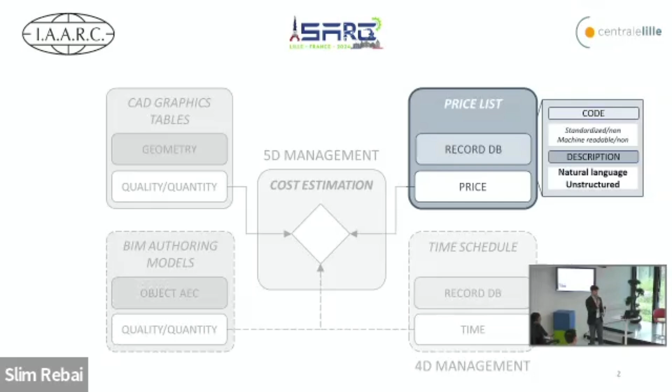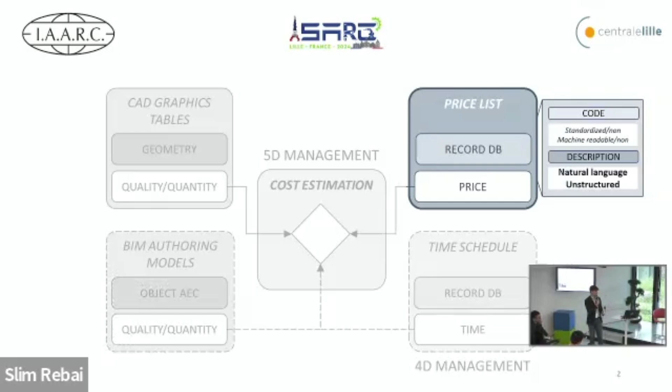In Italy, we have a price list that is a catalog of all the cost items necessary for the development of a construction process and the cost estimation in public tendering. And this price list is based on cost items in natural language. These items are not structured, and this is one of the main issues because this information is not machine readable, but only human readable. And there's no possibility to relate this information to structured data and validate this information at the end of the cost estimation process.

The aim of the research is to standardize this cost data, developing a cost ontology based on several entities characterized by specific attributes, starting from unstructured data and defining a new structured cost data.

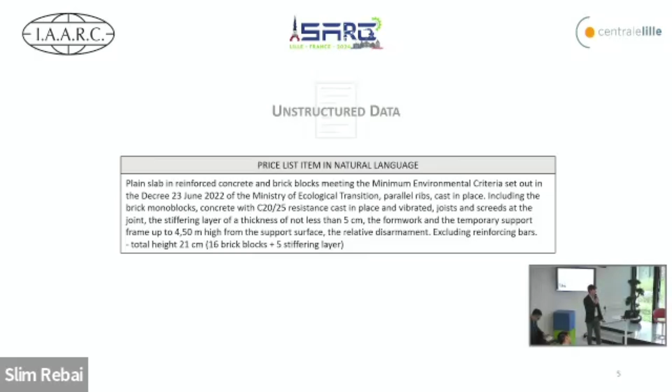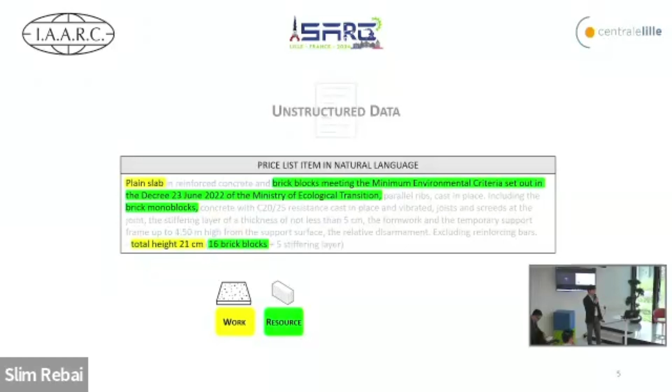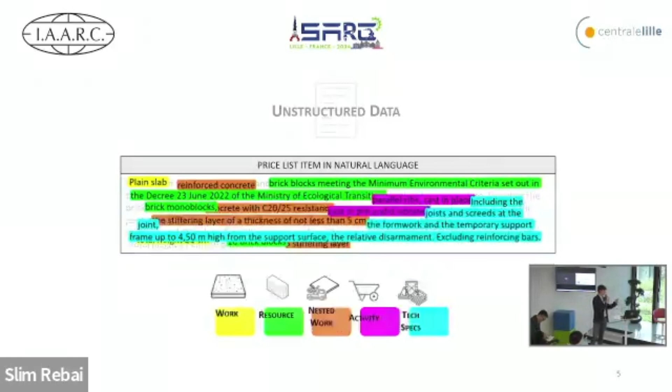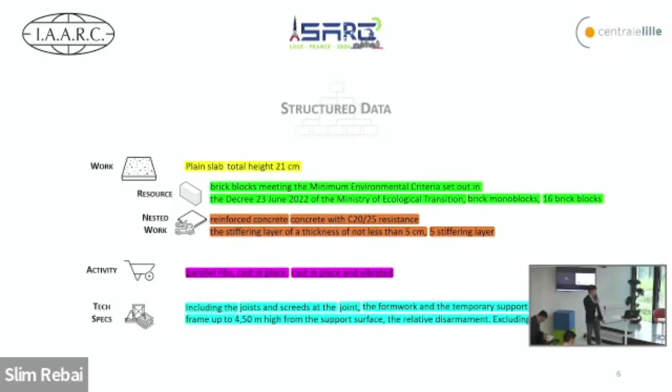This is an example of cost items in the price list of Lombardy region. And we can see that there's a lot of information that is not clear, but there's a lot of scattered information in this description related to the main work, to the resource, to the nested work, to activity, and so on. The aim of the research is to structure this data and define a clear and transparent structure for the cost items to ensure the information can be readable by a machine.

First of all, we define a new cost item architecture based on several entities. These are not simple text strings, but are characterized by several attributes. We divide the cost item into main groups, the construction works and the elementary resources. The elementary resources consist of labor resources, equipment resources, material resources, and the construction work consists of two abstract entities. The work entity is the physical entity of our construction work, such as the wall, the slab, and so on. And the activity is the action that must be performed to obtain the construction work.

Each of these entities is characterized by several attributes in which we can store this information, and these attributes were defined with the collaboration of several practitioners and industries in Lombardy region, with about 200 meetings in the first year of the project. This is an ongoing project that we are developing with Lombardy region.

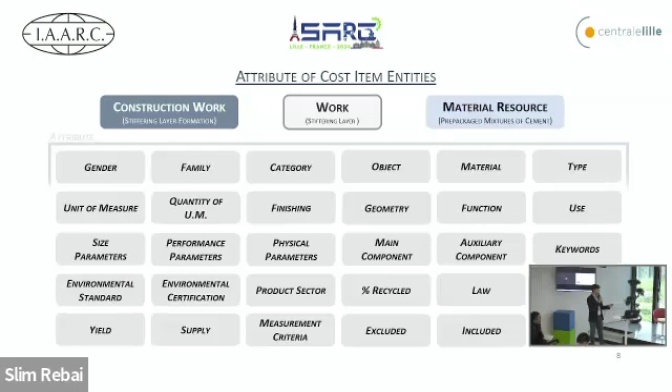And the result of this project is a new structure that is clear and transparent, and we can also obtain the new information of the construction work based on the logic of the price analysis, starting from the information of the elementary resources such as material, labor, and equipment.

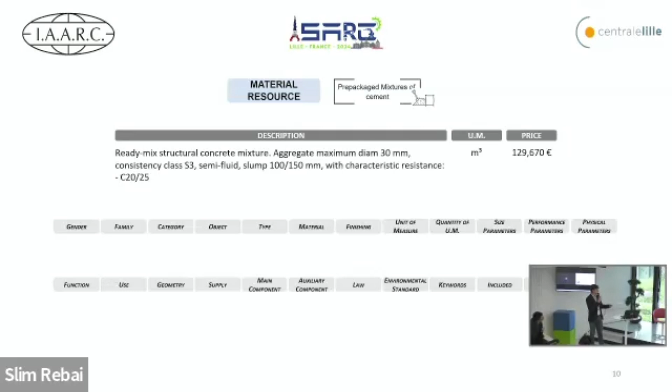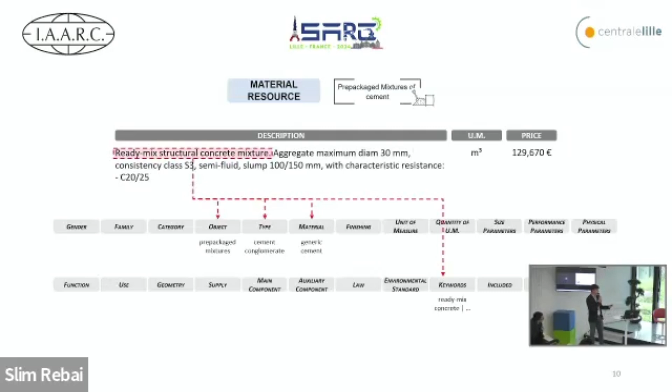Each of these entities is characterized by a cost data sheet based on these attributes, and we start to break down the current information of the natural language description into these attributes. And at the end of this process, we also enrich the cost data sheet with information that is not present in the current description.

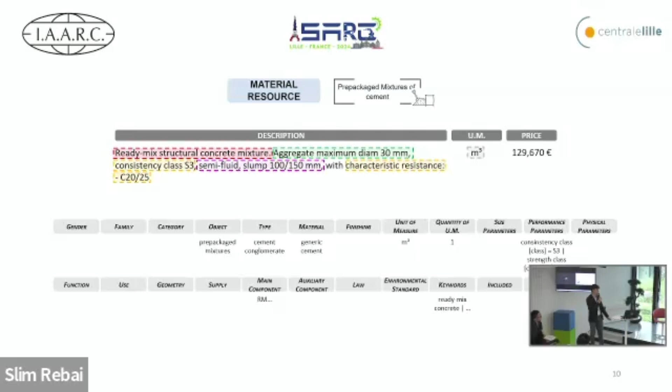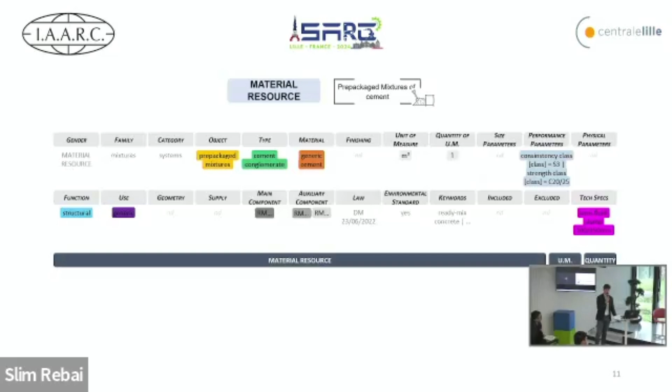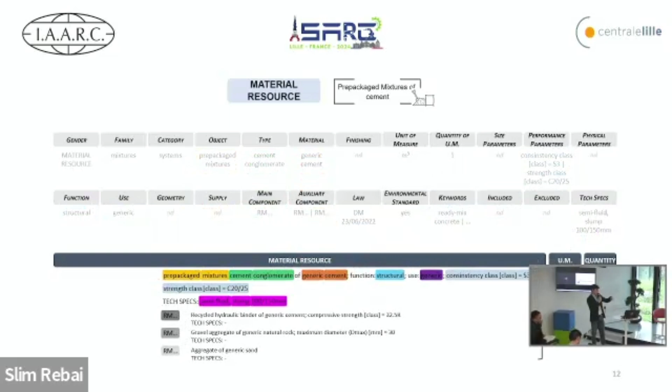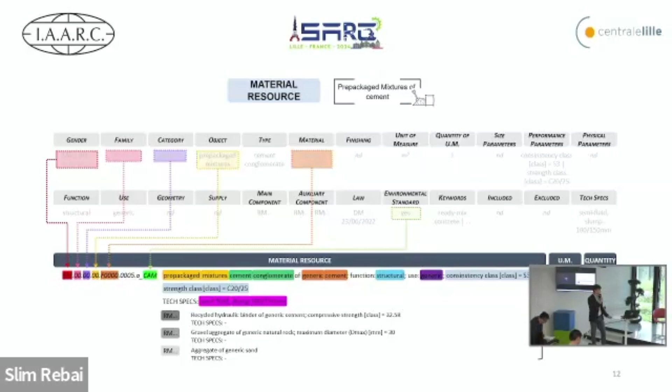We define this new cost datasheet, and from it we can create a new standardized description based on specific rules, and obtain a new structured description for the cost data. This description is divided into different levels: a general description and a specific, detailed description. We can also obtain a new code from this data, and this is not a simple identifying code, but a sort of speaking code.

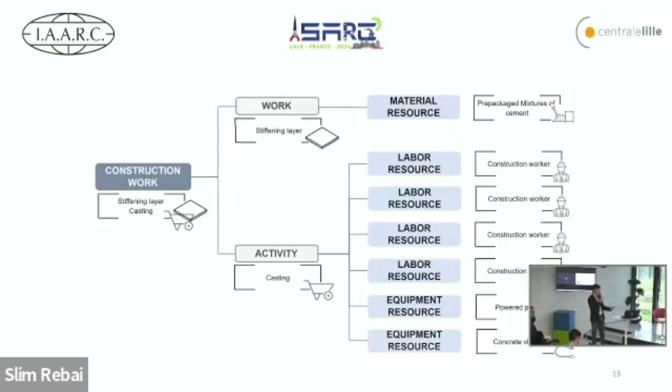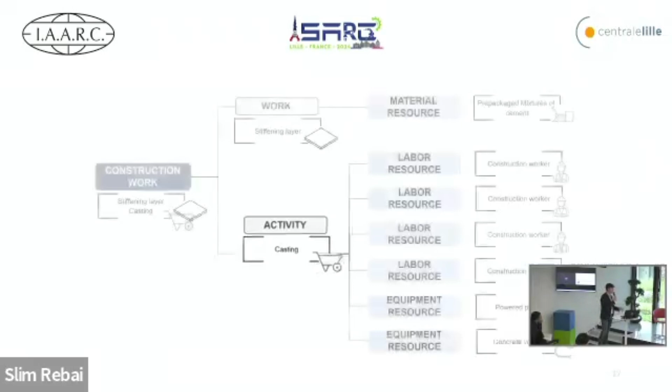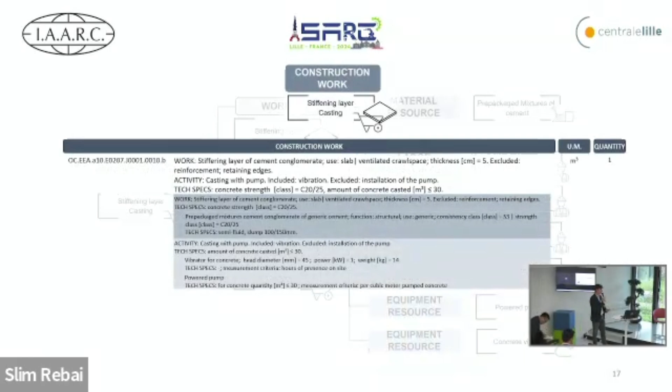In conclusion, this method ensures the creation of new structured data for the cost items. This method was validated using about 20,000 cost items, which were structured using this new architecture. And in the future, we can obtain a real connection with other information such as the BIM model, time schedule, technical specification and so on, and also validate this information, because nowadays there's no possibility to read this information by a machine. But with this new method, we can read and improve this information, because it is structured.

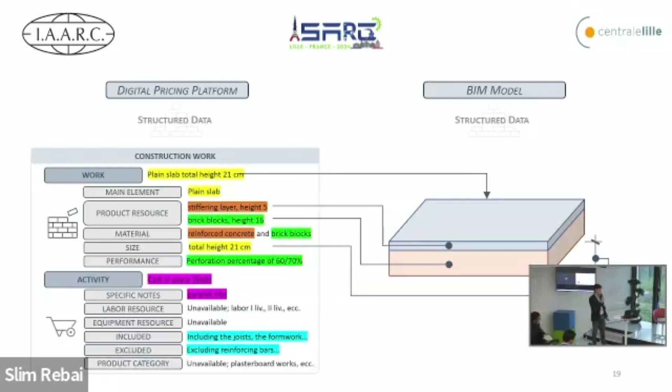In the end, the result is the creation of this new cost architecture and new cost data structure. We found some limitations, such as the use of uncommon terms, but these terms are based on the rules, the law, and the standards, and also a sort of industry culture and resistance to change by practitioners and final users. Future works can help the validation of the cost estimation against other crucial project documents, such as the BIM model, time schedule, technical specification, and so on.